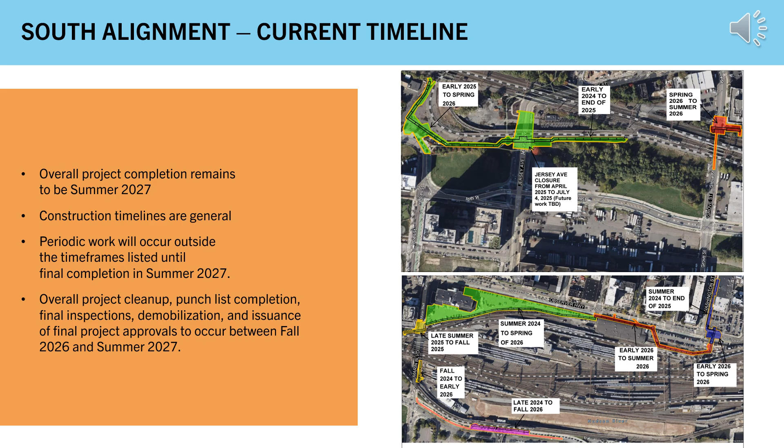There may be unforeseen subsurface conditions or situations that may arise during construction. In those situations, work can be stopped at those locations and move further along the alignment to allow for continued construction progress while resolving the conflict. We also want to note that there could be work outside of these timeframes. There is a process prior to completion during the summer of 2027 where there's going to be final inspections, demobilization, and final approvals that will need to occur.

The contractor is continuing construction along the northern alignment. The overall project completion remains to be summer of 2027. The sequence of construction will generally proceed in a linear nature.

There may be unforeseen subsurface conditions or situations that may arise during construction. In those situations, work can be stopped at those locations and move further along the alignment to allow for continued construction progress while resolving the conflict. We'd also want to note that there could be work outside of these timeframes. There is a process prior to completion during the summer of 2027 when there is going to be final inspections, demobilization, and final approvals that will need to occur.

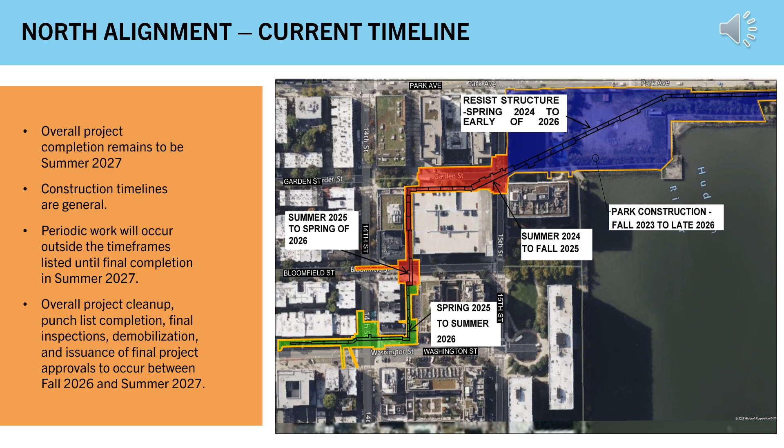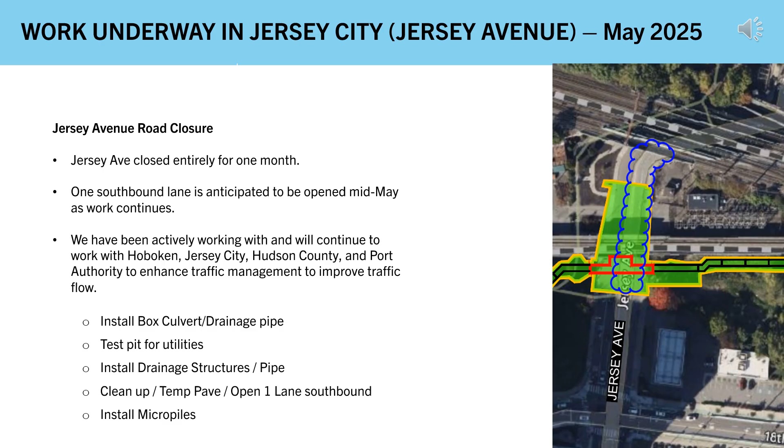Some other work includes install box culvert, drainage pipe, test pit for utilities, install drainage structures pipe, cleanup, temporary paving, and open one lane southbound, and install micropiles.

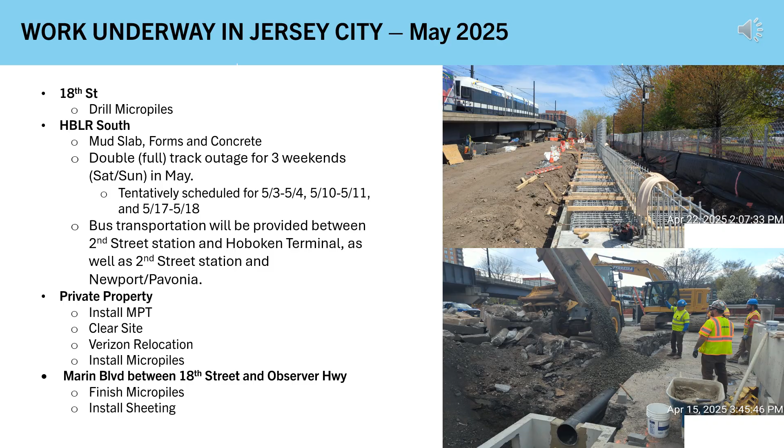Work in the north area has also been initiated. Bloomfield Street remains closed to pedestrian and vehicular traffic between 14th and 15th Streets. This closure will last around 3 to 4 months for this phase of construction, and started in February. Access to the residential garage from Bloomfield Avenue will be maintained.

There may be periods where they have to revisit locations throughout this project, and we want to note that there is intended work that is going to happen concurrently between the north and the south project areas.

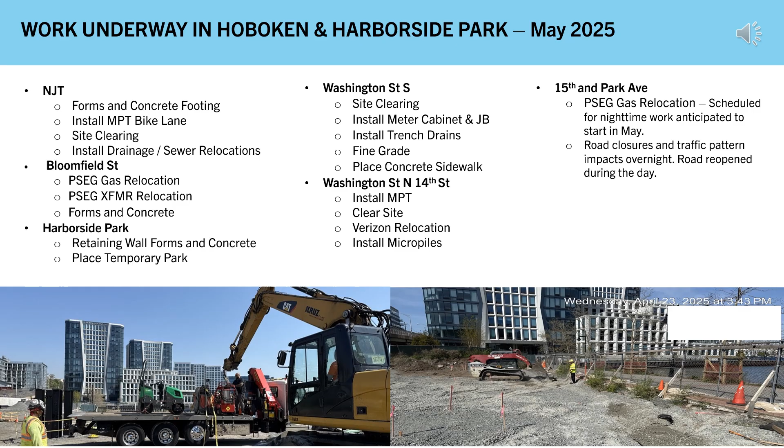At 15th and Park Avenue, PSE&G gas relocation is scheduled for nighttime work, anticipated to start in May. This work includes running a gas main through the intersection overnight. The intersection will be closed overnight and open during the day. Exact dates are to be determined. Please stay up to date by checking our weekly advisories that come out every Friday.

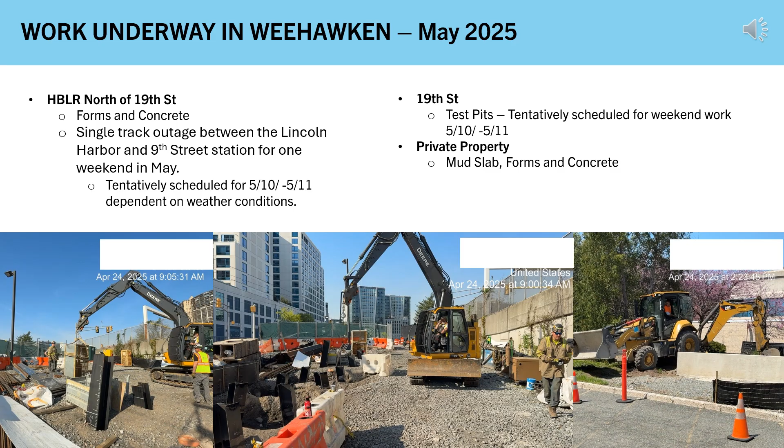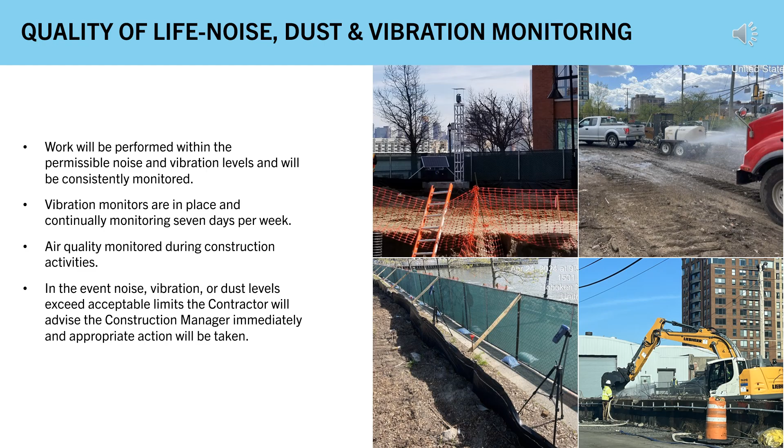In the event that noise, vibration, and dust levels exceed the acceptable limits, the contractor will advise the construction manager immediately, and appropriate action will be taken. The DEP continues to coordinate with the Resist construction contractor to ensure compliance with all dust control requirements that meet state regulations in the contract.

Traffic maintenance and protection will be ongoing through the project. Periodic lane shifts and/or lane closures are determined in close coordination with Hoboken Police Department, the Jersey City Police Department, New Jersey Transit, and Hudson Bergen Light Rail Watchmen.

Also, the Hoboken Police Department, the Office of Emergency Management, the Jersey City Police Department, New Jersey Transit, and Hudson Bergen Light Rail Watchmen will assist with traffic flow for any lane closures and provide traffic control officers to guide pedestrians. No parking will be permitted within work areas during closures.